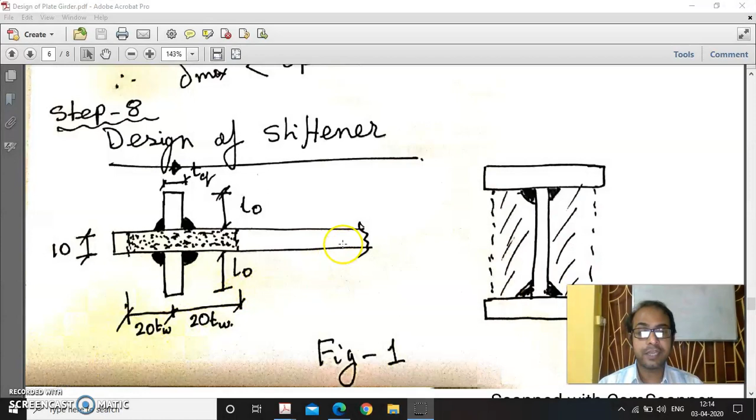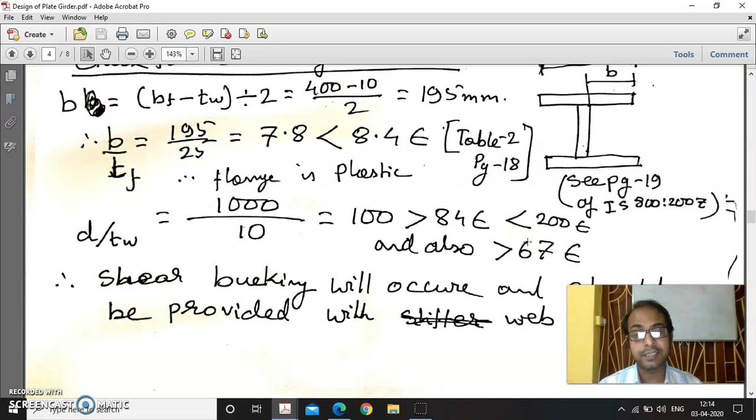To start with the design of stiffener, I will refer to a previous portion of our design where we checked the D by TW ratio of the web, and found it is greater than 67 epsilon. As per the provision of IS 800, shear buckling will occur, and to resist this shear buckling, we are going to provide stiffeners.

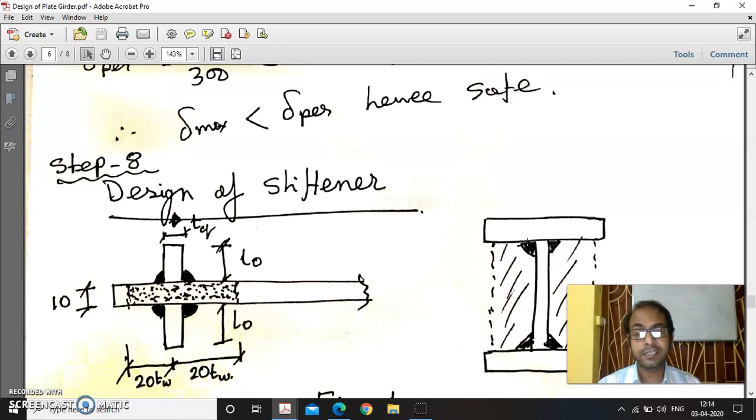We have two types of stiffener: bearing stiffener and intermediate stiffener. Bearing stiffeners are those provided just above the support. First of all, we have to check whether the bearing stiffener is required or not, that is, if the web itself is capable of taking the bearing pressure, it is not needed to provide the bearing stiffener.

As per clause 8.7.4 of IS 800, page 67, bearing stiffener should be provided for web where force applied through a flange by load or reaction exceeds the local capacity of the web, and its connection to the flange.

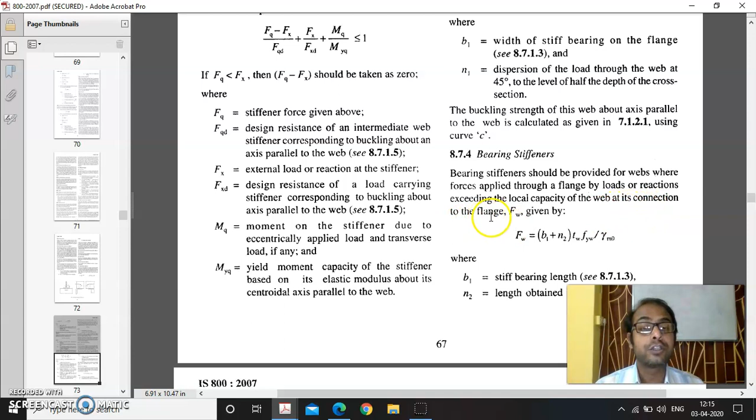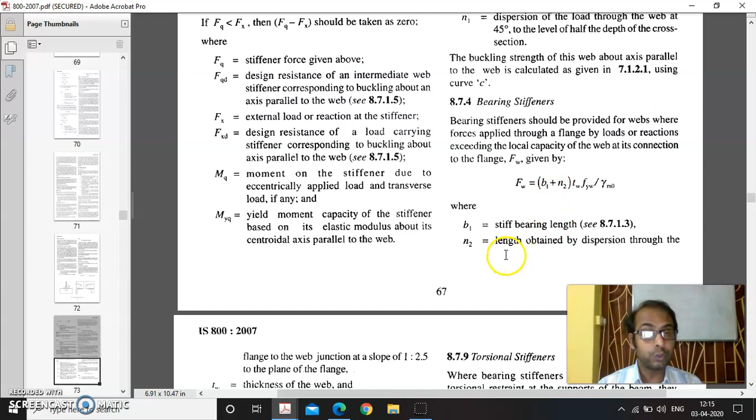Fw is given by this formula. B1 is the stiff bearing length, and N2 is the length obtained by dispersion through the flange to the web junction at a slope of 1:2.5 to the plane of the flange.

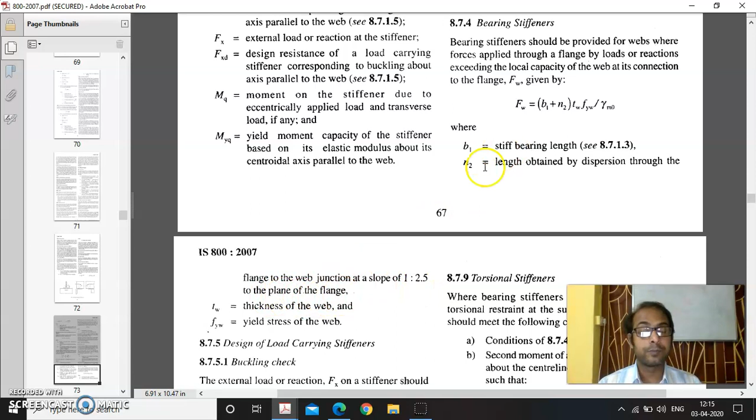So as we are testing this by not providing the stiffener, we will take for the first term B1 equals 0, and N2 is found to be 125. How is it found? Here we see the web to flange junction, and the thickness of the flange we have already calculated as 25 millimeter.

So if it goes at a 1:2.5 ratio of dispersion angle, it will have a length of 2.5 millimeter, so 2.5 into 25 millimeters will be 125, considering two sides. So N2 is considered as 125.

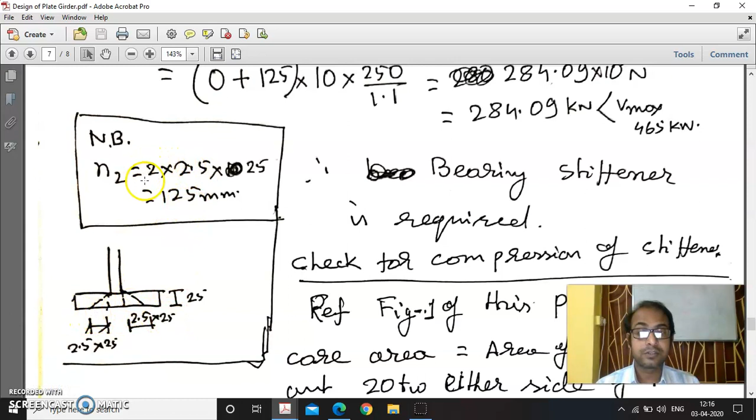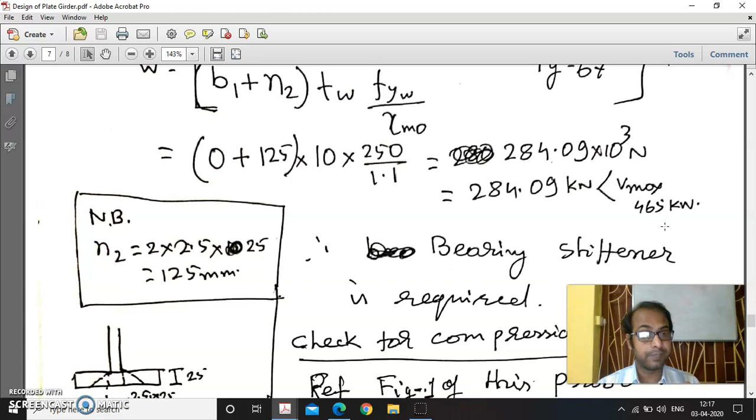Now TW is 10, FYW is 250, and with the 1.1 factor we got it as 284.09 kilonewton, which is greater than Vmax, that is 465 kilonewton. This shows that the web is not capable of taking up the bearing pressure without the provision of bearing stiffener, so bearing stiffener is required, as our assertion here.

Now we'll check the compression of the stiffener. In figure 1, we must consider the core of the section. Here also in our code we have the provisions.

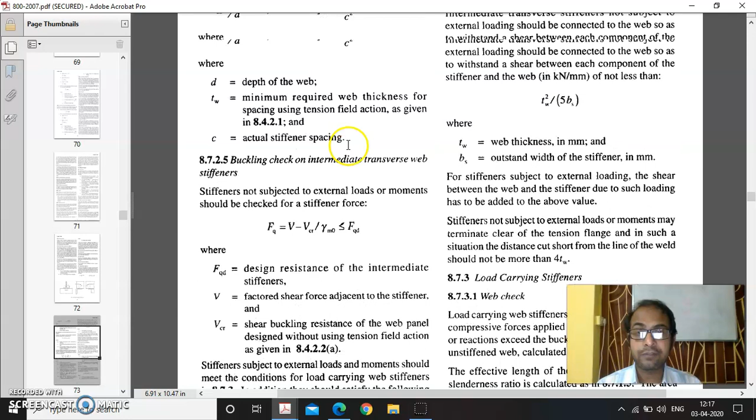As per clause 8.7.1.5, page 66, let us read the clause. The buckling resistance FQD should be based on the design compressive stress FCD on the strut of curve C. They have said we have to consider this bearing stiffener as a strut along with the core area, and this should be considered as buckling class C, where the core area has been referred.

The radius of gyration is taken about the axis parallel to the web; the effective section is the full area or core area of the stiffener together with the effective length of the web on each side of the central line of the stiffener, limited to 20 times the web thickness. The design strength should be the minimum value obtained by buckling about the web or the stiffener.

So as shown here, we have to consider 20 times the web thickness on either side. This portion of the web along with the web stiffener will act as the core of the section, which will comprehensively act as a strut in this case.

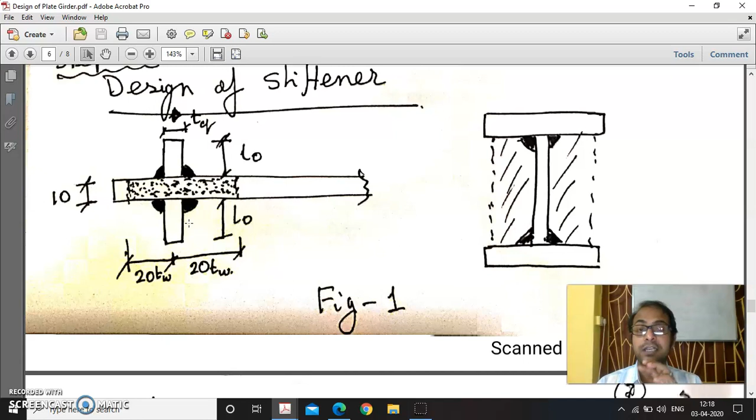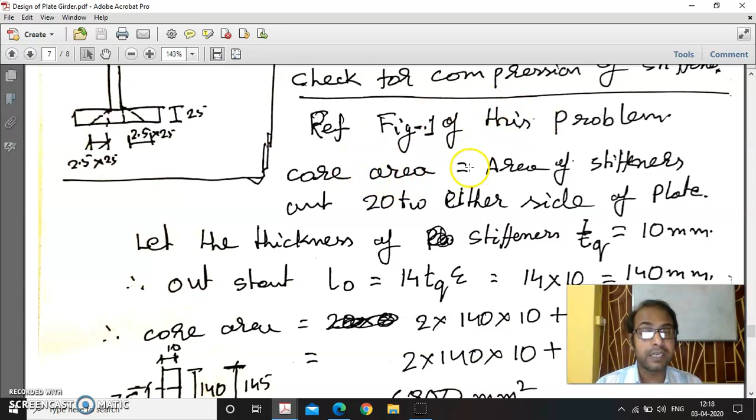So what we have done, for checking the stiffener, referring to figure 1, we have considered and calculated the core area of the section, for which first of all we have to find out the projection here.

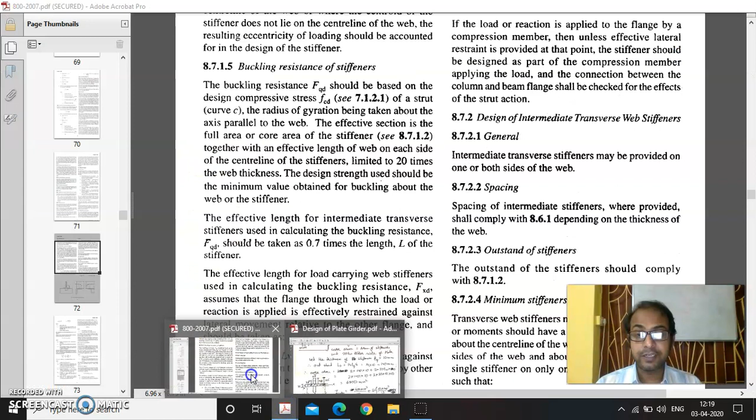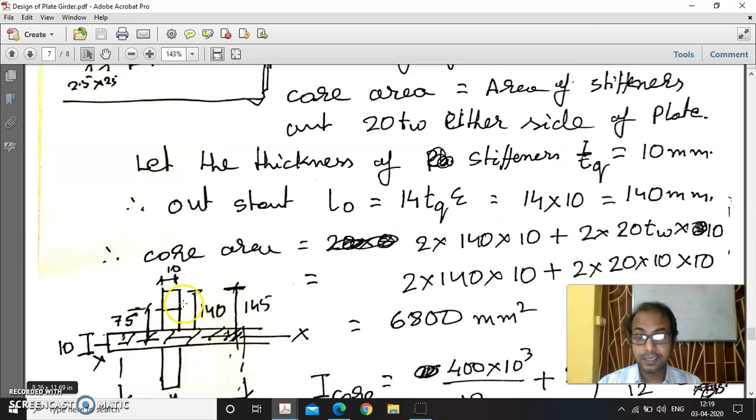According to the code, we have to find out the projected area. We see there is a provision in clause 8.7.1.2, outstand of the web, on page 65. Outstand means this portion, the portion which is projected beyond the web portion. Looking at this picture, this is the projected one - how much projection or outstand will there be?

Unless the edge is continuously stiffened, the outstand of the face of the web should not exceed 20 TQ epsilon, where the outstand of the web is 14 and 20 TQ. The stiffener will be designed on the basis of core of section with an outstand of 14 TQ epsilon, where TQ is the thickness of the stiffener.

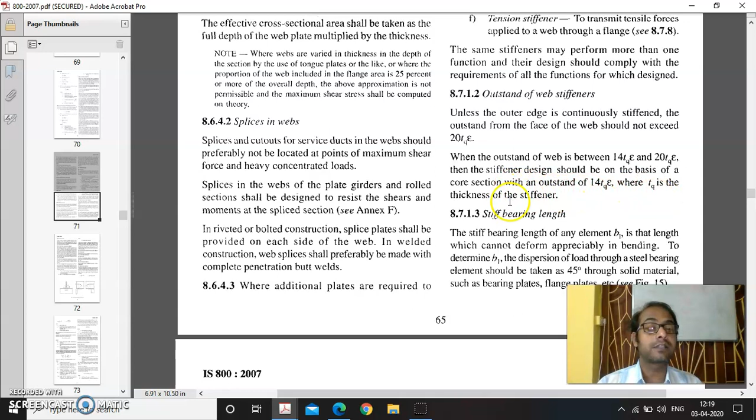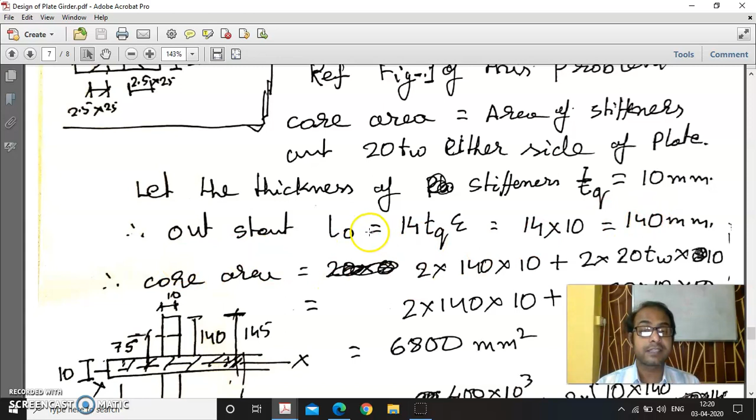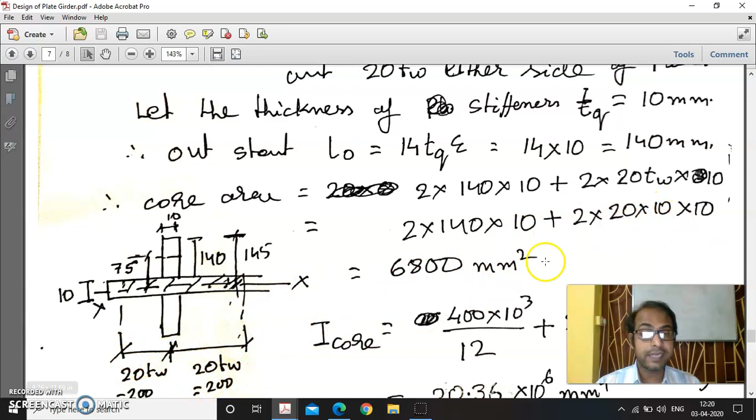In the example problem, we have considered the thickness TQ as 10 millimeter. So the outstand L0 comes as 140 millimeter, and the area will be 2 into 140 into 10 - there are two stiffeners - plus 2 into 20 TW into 10, where 20 TW comes as 200. For either side it comes as 400. So the total area is 6800 millimeter square.

Now to find the compression capacity, first we have to find the core area and moment of inertia value. So we calculated the moment of inertia about this axis - they have mentioned we have to consider the longitudinal axis of the web. This provision is given in the code, so it will be BD cube by 12 of the web portion.

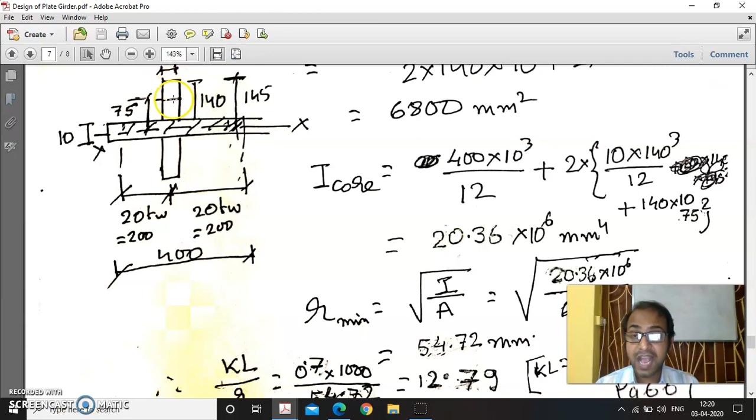400 into 10 cube divided by 12, plus BD cube by 12 plus parallel axis transfer for the stiffener portion, where B will be 10 and D is 140 cube divided by 12.

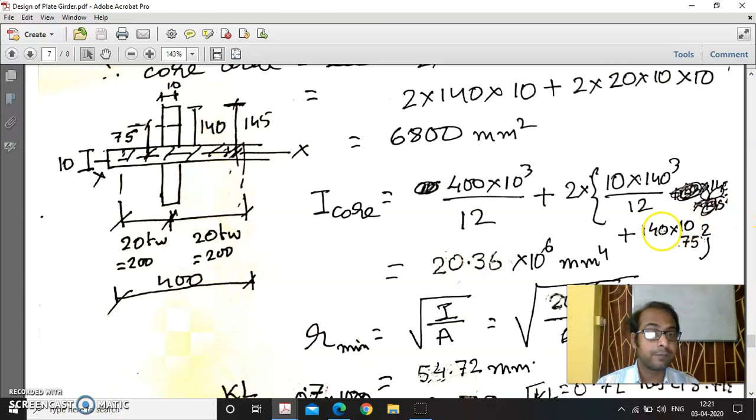Now what should be the distance between the CGs - this distance is 70 from this face, and half of the 10 will be 5, so it comes to 75. So it will be 140 into 10 into 75 square. So the moment of inertia comes as 20.36 into 10 to the power 6 millimeter to the power 4.

To find the minimum radius of gyration R, we have to find root over I by A. This is I, and we have already calculated A. So I by A comes as 54.72.

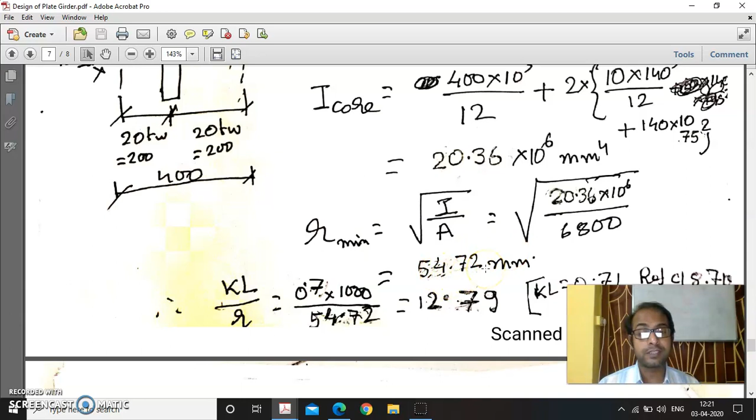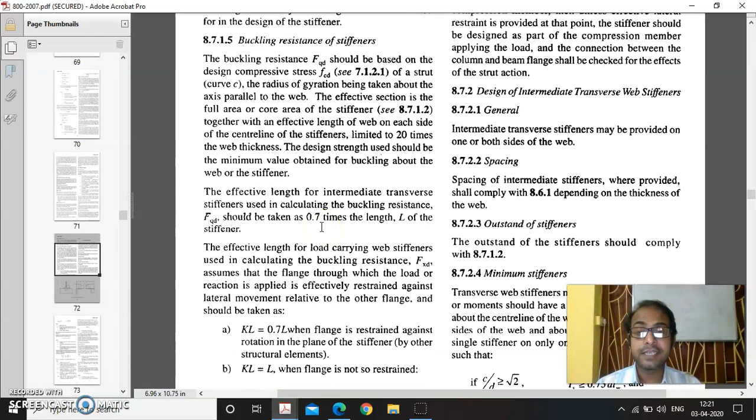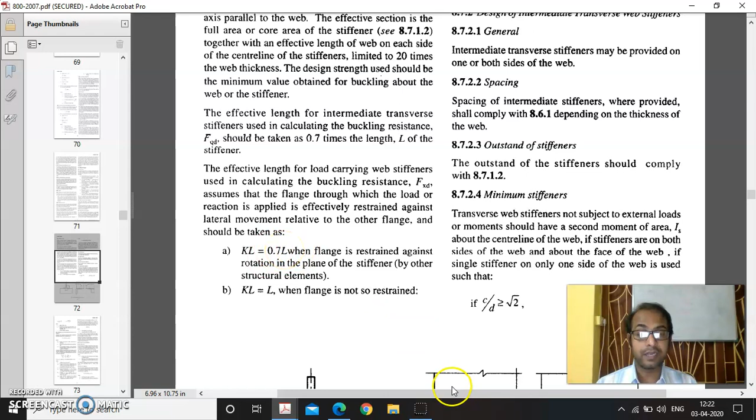Now we have to find the slenderness ratio KL by R. What should be the value of K is given in the code - just below this clause, on page 66, it is mentioned that the effective length of the intermediate transverse stiffener used in calculating buckling resistance Fqd should be 0.7 times of L, and also for the bearing stiffener it is considered as 0.7 into L. So we considered the effective length as 0.7L, and divided by R comes as 12.79.

We referred to the clause, and it says we have to consider it as buckling class C. So table 9C is considered, which is on page 62 of IS 800, from where we can calculate the value of FCD if we know the grade of steel. Grade of steel is given as Fe 410, so the buckling yield stress Fy will be 250.

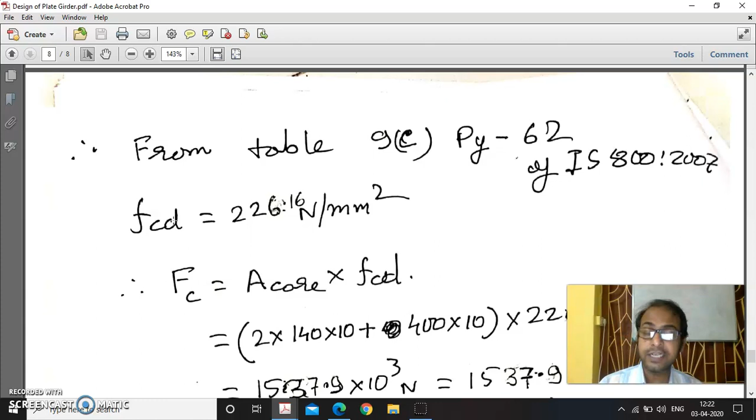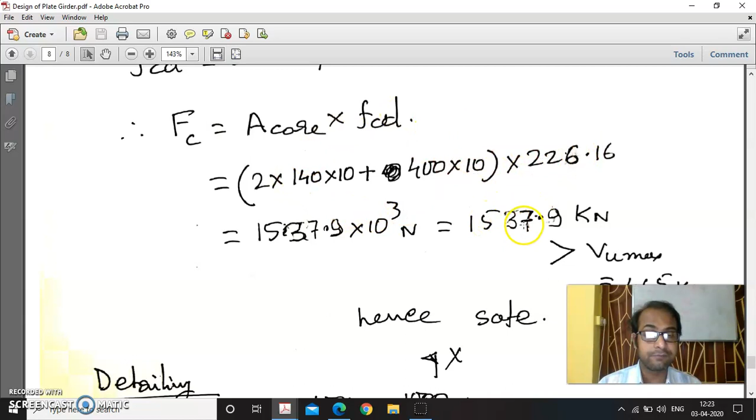So FC will be A core into FCD - this is the area of the core, and this is the FCD. It comes as 1537.9, which is greater than Vmax. Hence, it is safe. This is the simple detail I have provided for your reference.

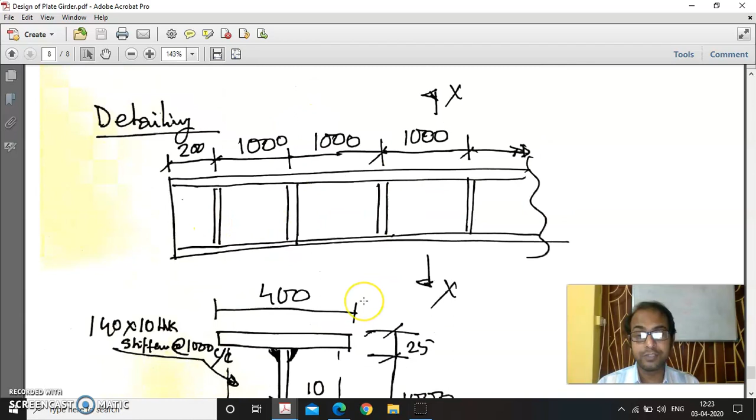The center to center distance is 1 meter. We have said C will be equal to D, and this is the cross section where we have to mention all the dimensions clearly. So with this, the design of the plate girder ends. Thank you.